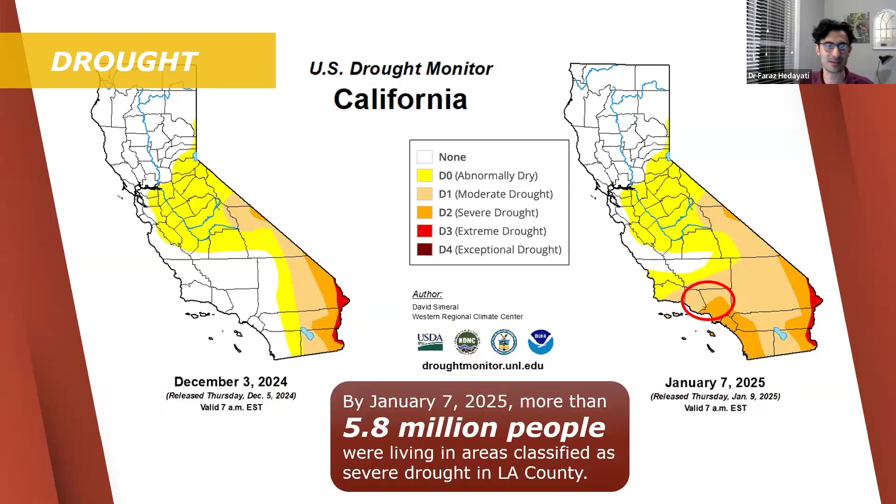So let's start on those and see what the conditions were in the tragedies that we saw in LA. What we had in LA County and Ventura County, the two I highlighted here, is that in about a month we got into severe drought. This is like a flash drought, and what it does to the surface fuel in that area, like chaparral, is quickly dry it out. And when it comes to the wind condition, Santa Ana winds are something that we have at this time of the year.

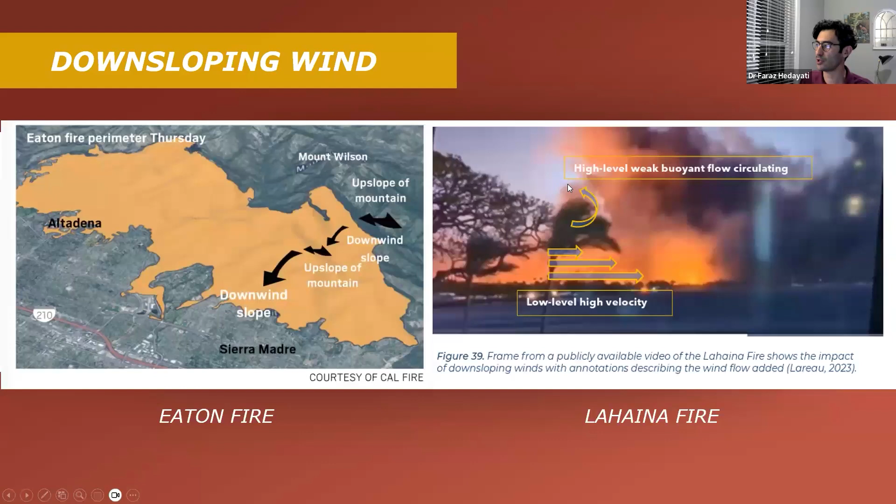This kind of wind exists in Hawaii, in Colorado; different parts of the world have different names. Chinook is another famous name. But they share similar characteristics: at lower altitudes, right off the surface, they have higher velocity. The photo on the right-hand side is actually from Hawaii, which I'll come back to later with the tragedy we had in 2023 in Lahaina. The flow momentum is much higher at the surface compared to the high-level weak buoyant flow or high-level buoyant flow up here.

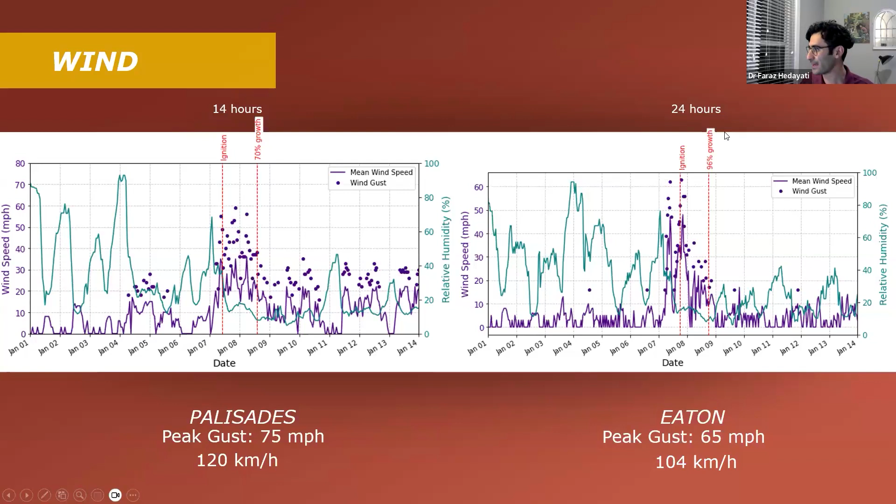The wind speed measured in the LA County fires was about 120 kilometers an hour in the Palisades fire and 104 in the Eaton fire. At this wind speed, all air suppression is grounded and cannot operate. So in only 14 hours, 70% of the growth of the Palisades fire happened, and in 24 hours, 95% of the Eaton fire. So I went through all the natural environment conditions that were in place. All of them were in the most adverse condition.

Now let's move forward and focus on the other category, the built environment. I want to spend some time on structure density. What we did at IBHS to attack this structure density problem was a divide and conquer approach: we started by looking at fire spread from a shed to the main building. I have a source building that is burning, the target building, and I'm measuring the heat flux on the target building. These are full-scale experiments.

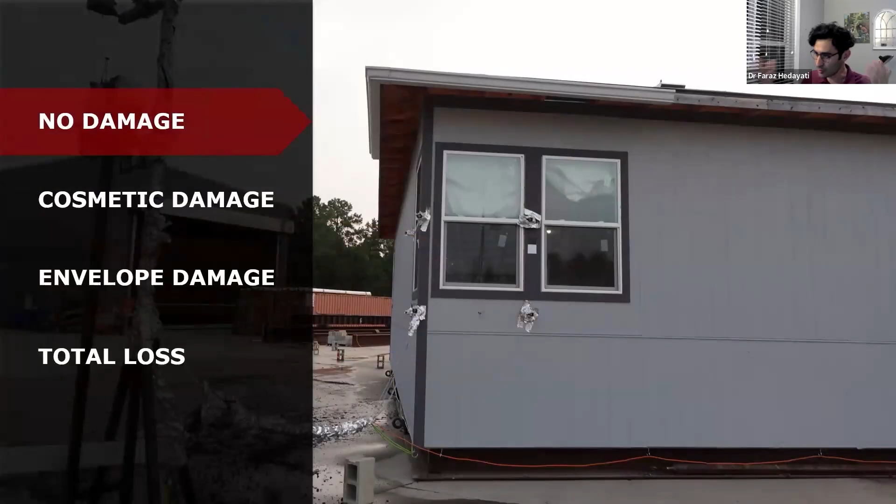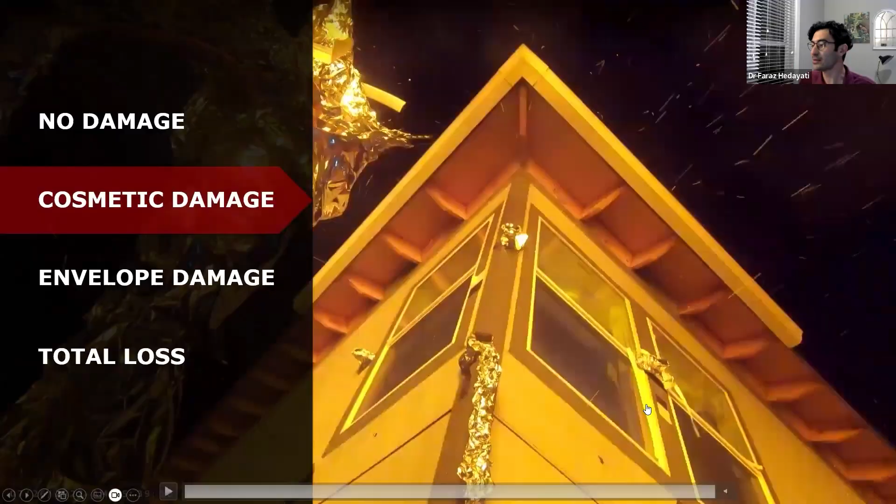The distance between them is 40 feet here. I changed that. The material on the target building changed, the angle, the wind speed, and also the shed type, wood or metal. You see one of the experiments at 40 feet; about 25 of my colleagues were involved in each of these experiments. Going through the damage modes very quickly, we had no damage in two cases at 40 feet separation. Then you see this vinyl glazing melted, and it's dangling around. This type of window has about 70% market share in the US, a very dominant presence.

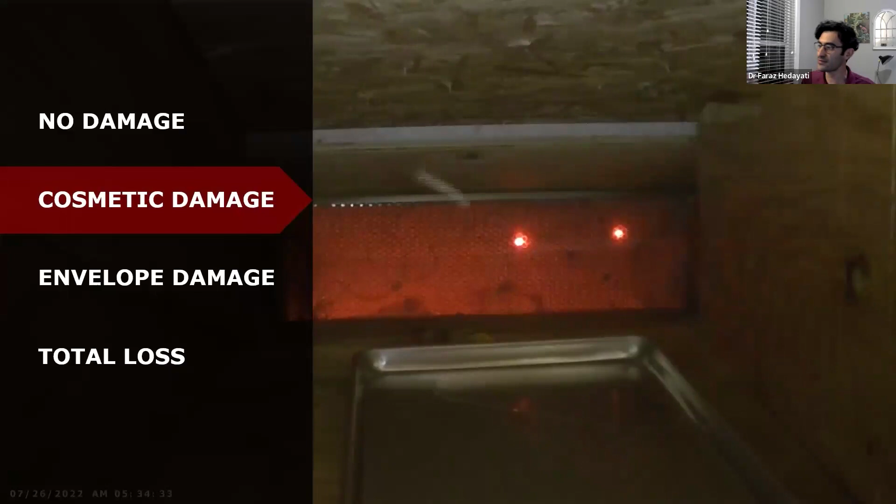When it comes to vents, we all know that embers can get into the attic through the vents. These vents have intumescent paint, so as they receive heat, they expand. So in order to maintain the right ventilation rate for the attic, that needs to be removed, and then some pressure washing, because we had soot accumulation here.

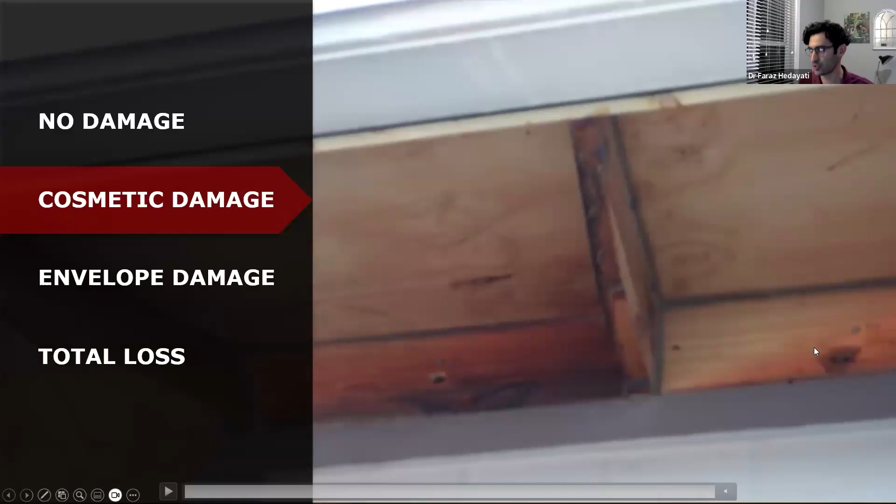Going to envelope damage, you see this window falling out. This one will shortly do the same thing. These are tempered glass. We know they are better than annealed glass, and they just fall out; they don't shatter in place. Annealed glass shatters in place. And this is the aftermath. You need a handyman to basically fix this building. The non-combustible fiber cement siding bowed out in 2 experiments.

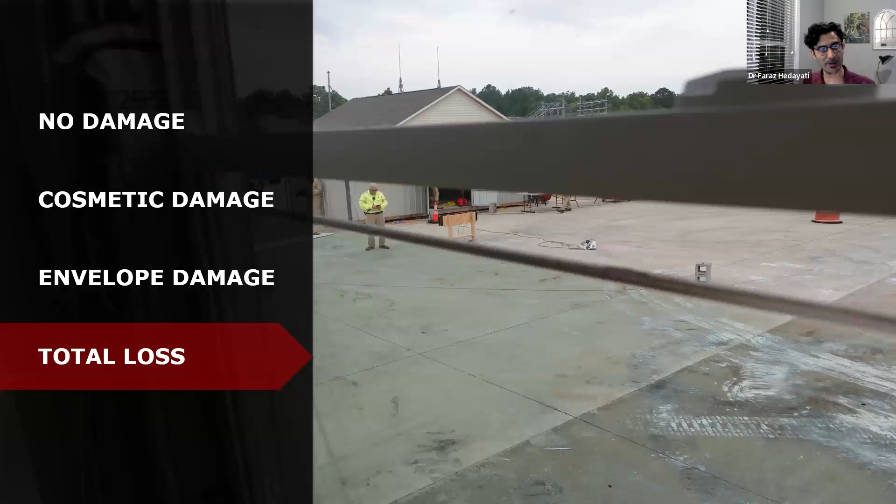A more severe damage that I had: the moving sash of the vinyl window actually bowed in. You see there is an opening here. It's not a wide gap, but it's more severe because after losing the outer pane, the moving sash was deformed. And then we get into total loss. After losing the outer pane, the inner pane slid down in 2 experiments, and this is wide enough, about 5 centimeters, for embers and flames to get in. I put this in total loss because we basically lost the envelope of the building.

In one of my experiments, the fascia board ignited, and the parts that were not covered by non-combustible gutter, you see how that ignited. It wasn't a sustained flame, but if I had let it go, it would convert the building to a pile of ash.

Another building, a more intense ignition on the target building: you see that the eave is engulfed in flames at 10 feet separation, and that's why enclosed eaves are very important in dense neighborhoods, because flame can touch the eave area. And in one of my experiments at 20 feet separation, half of the building is combustible, the other half is non-combustible.

Upon ignition, 5-6 seconds later, flames get through the vents into the attic, basically. Remember I talked about the intumescent paint and how that blocks flame and ember entry? In this case, it did not. And there are several reasons for this. We can get into Q&A about why it didn't happen, but it didn't perform the way that I was expecting it to.

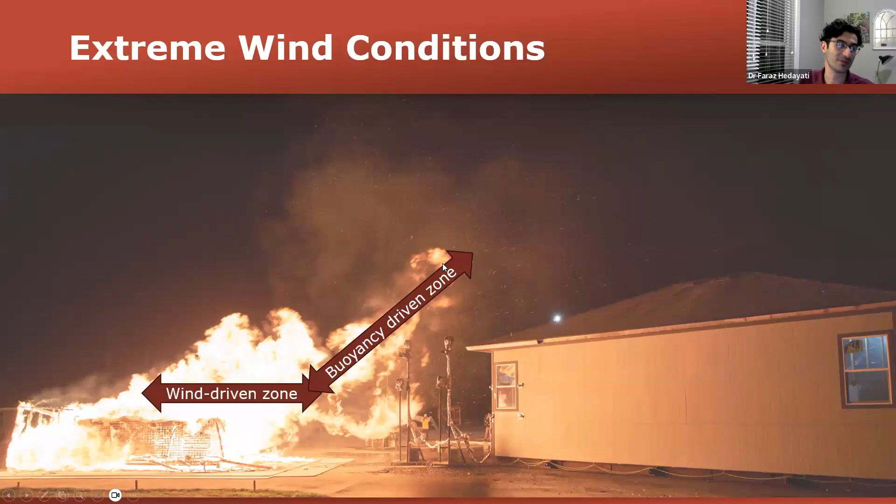So everything I presented up to now were all experiments at 25 to 30 miles an hour wind. Sorry for the units. And then I increased the wind speed to 55 miles an hour. What happens here is part of the flame becomes wind-driven and part becomes buoyancy-driven. The stronger the wind is, the shorter the buoyancy-driven zone is. At 55 miles an hour, I barely have any buoyancy-driven zone. All the heat that was supposed to go into the atmosphere now is touching the target building and igniting it.

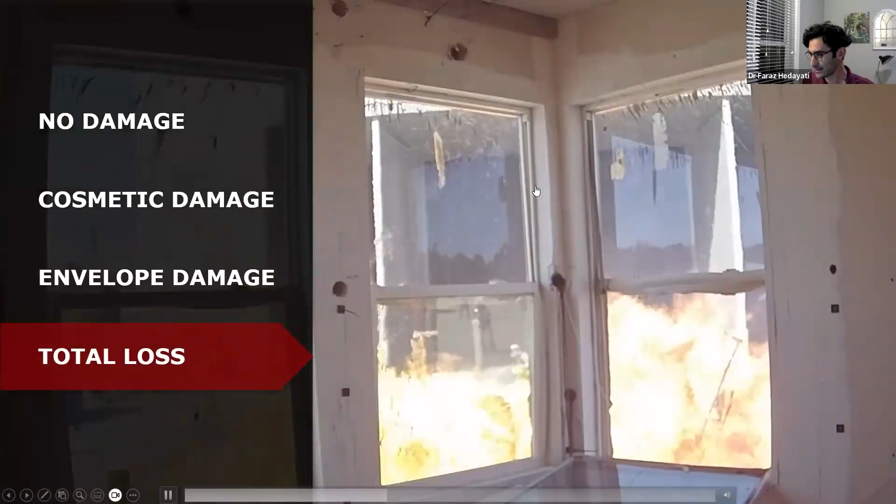We see that we lost some shingles at high wind speed, and this is an interesting failure. This window failed, and you can see this one is pulsating, and at some point it just pushes the window in. So the hot gas or the convective heat transfer softens the material, the vinyl, and then the wind pressure pushes that in.

The other common criteria in our field is to look at total energy that the target building received. And you can see that in the case that led to ignition at 10 feet, it is lower than the rest of them. So this too is not the criteria to look at when it comes to discriminating the risk. The reason is that it happens at a shorter time. The building ignites, there is no energy to receive after that, right? So a shorter time, less energy.

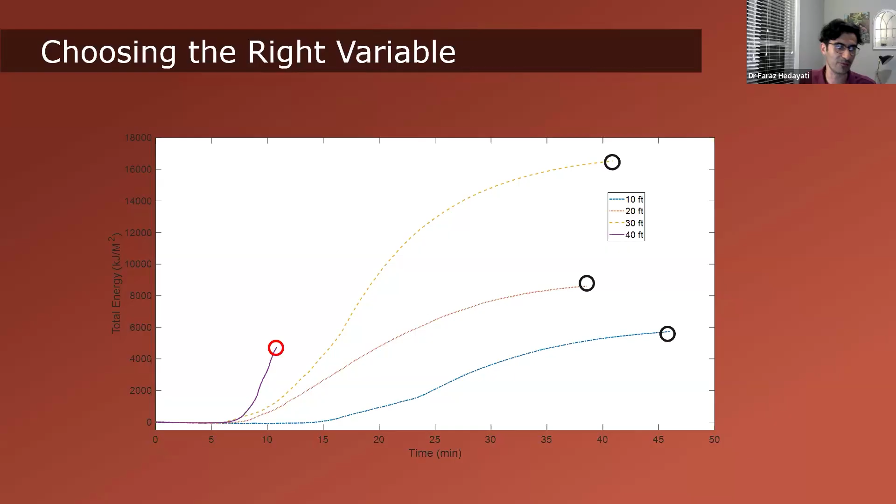But if we look at energy input in 10, 20, 30 seconds, and I don't want to get into the details, the reason I'm going after tens of seconds is that it's the response time of building materials. Pine needles are in the order of a second, building materials in the order of tens of seconds. We start seeing a very interesting pattern.

We see that among all the possible outcomes, when I have no damage, all the events are here in this range, right? When I have some damage, the distribution changes. There is a meaningful shift to the right. Similarly, when I get to loss, this shift continues to move forward. So imagine I have this threshold here. I'm well into the orange distribution, this one here, and start to touch the loss distribution.

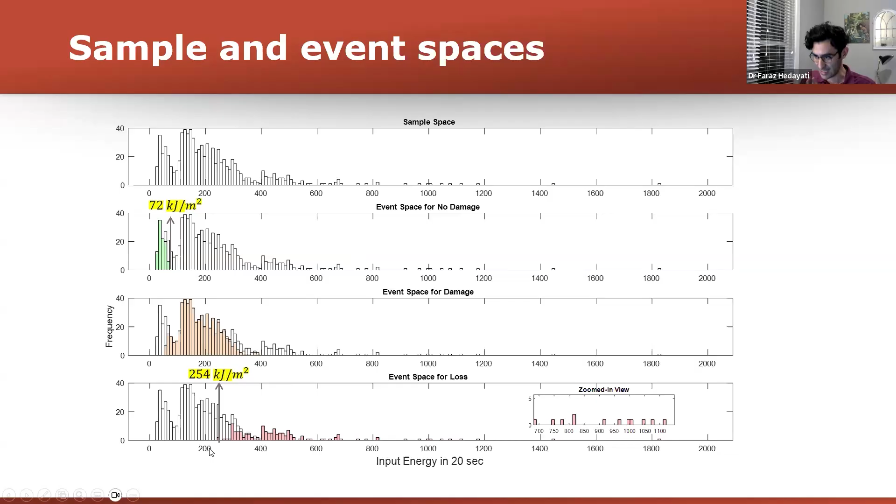So in a probabilistic way, I can look at it and ask, what are the different possibilities or likelihood of damage modes? But the takeaway is, if the energy input is above this threshold, I get into damage, and if it's above this threshold, I get into loss.

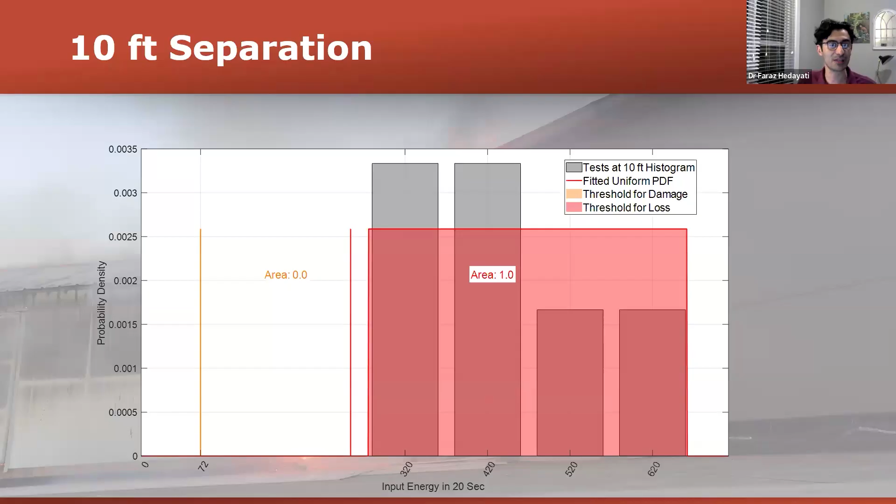So at 10 feet separation, we see the background photo, direct flame contact, and the gray histograms in the background are the energy input. All of them are above the critical threshold. So I'm 100% into this distribution. Going back to 20 feet, from 100% I go down to 34%. Now I have a way to discriminate the likelihood of total loss as the distance increases.

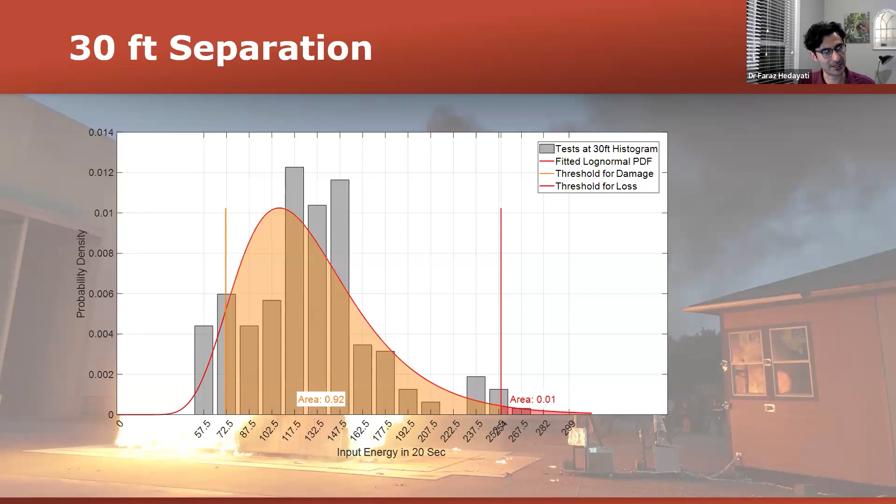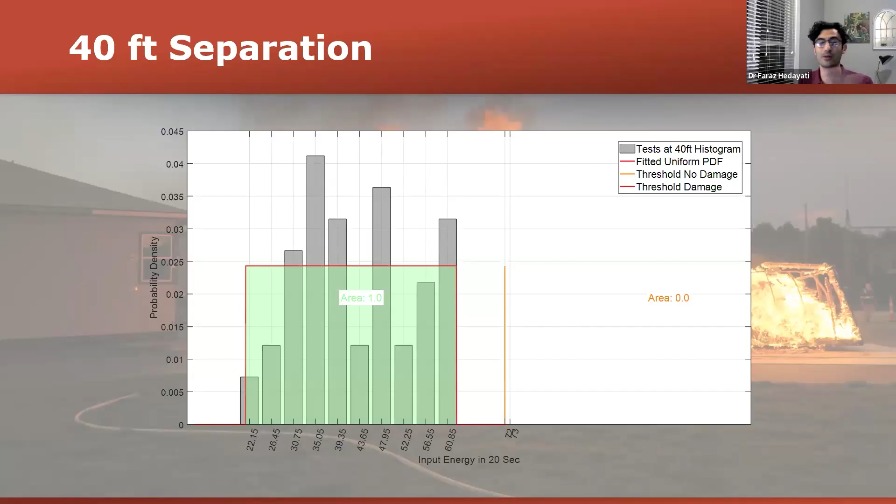Going further back, there is no flame contact, it's mostly radiation and convective heat transfer, and it gets down to 1%. And at 40 feet, you can see in the background the flame is not even close to the target building, and all of those energy packets are below the lower threshold. So I have no chance of any damage on the target building. And this is the takeaway.

With the conditions that I have here, I'm not going to go through this list, but these are the limitations of this framework, basically what I tested. We can see that as the distance increases, what is the likelihood of structure-to-structure fire spread in these configurations.

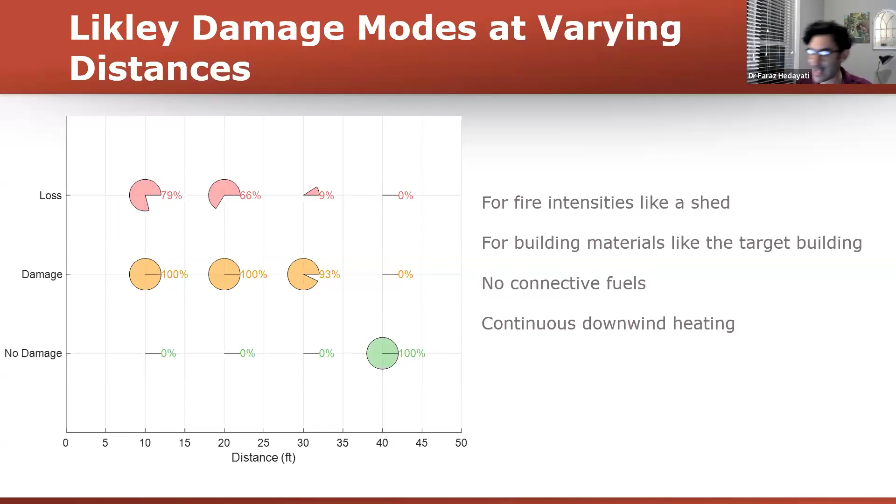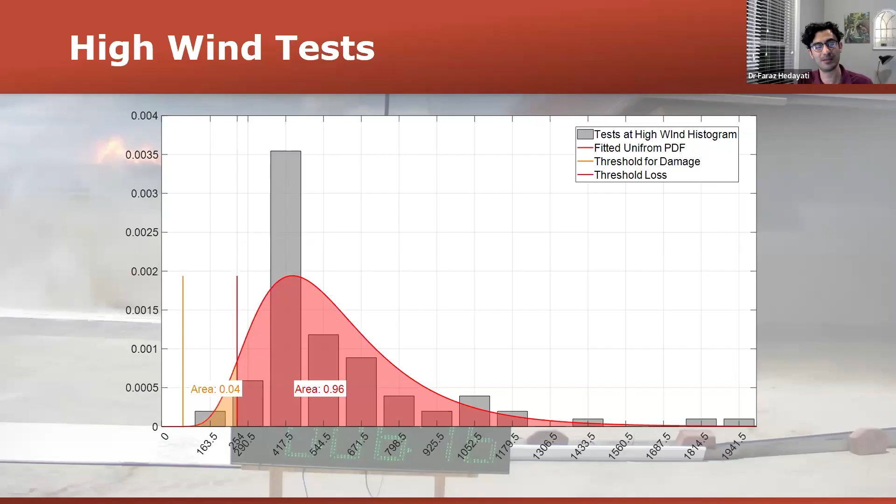I didn't talk about high wind speed and the impacts of 55 miles an hour wind on the outcome. Well, regardless of the distance, 96% into the distribution and into the loss distribution. And this is actually what happened in Lahaina, what happened in the LA County fires. The wind speed pushed all that heat that was supposed to go up to the buildings downwind, and then that led to overwhelming the building material. Anything that was in the typical building materials all got overwhelmed, and we see that tragedy.

We saw that tragedy. So after this shed experiment, I scaled up to ADUs. So similar approach, but instead of a burning shed, now I have a burning accessory dwelling unit or ADUs. So as you're looking at this video, one of them is wood, one of them is fiber cement, and one of them is stucco. And we see that regardless of the siding, the way that these buildings fail is the same. Doors and windows fail way before the siding plays a role.

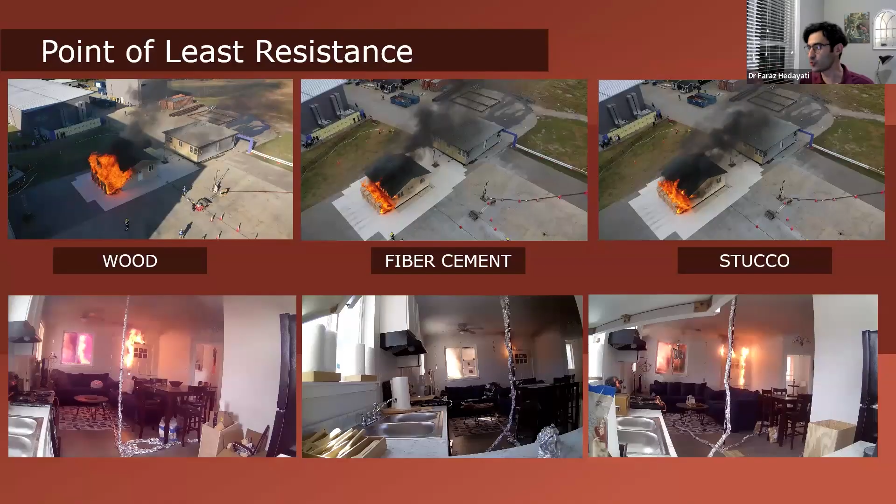There are ways to quantify it, which we can talk about offline. But the point of least resistance is a very important topic, and it is very important to look at the building as a system, not individual components. Well, while the siding didn't play a role in reducing the vulnerability of this building specifically, it does play a role in slowing down the fire spread in the community.

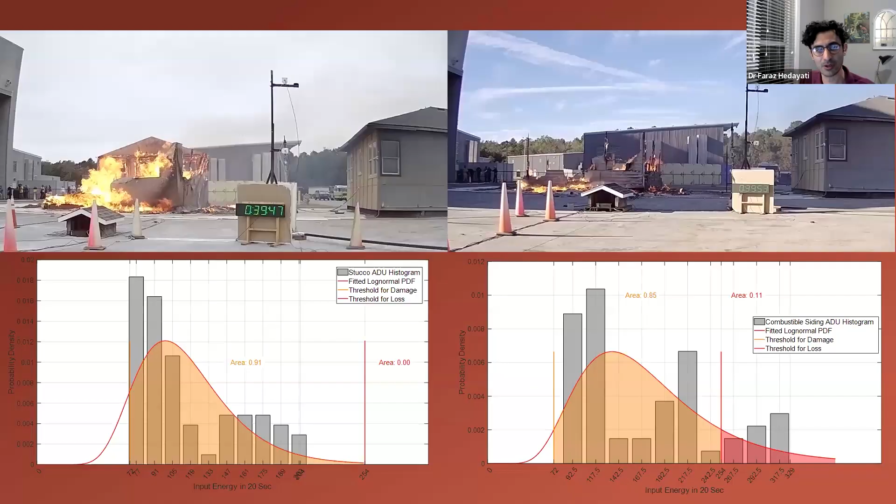So you can see after 40 minutes, this is a stucco building and this is a wood building. Because the structure stays in place for a stucco, it traps a lot of the heat behind it, basically. And we see that none of those energy packets that were hitting the target building is in the loss zone. But when we have wood, we clearly see a difference. So this is very important that if we use stucco or this kind of material, we can slow down the progress of fire in a community.

So going back to LA, this is in Palisades, and I talked about at 40 feet separation, there is zero chance of any loss, any damage. This shows that this building is 60 feet apart from this, and the wind speed is from right to left here, like that. So all of the heat that this building released was hitting 221. And because the window was extremely vulnerable, one pane, annealed glass with wood frame.

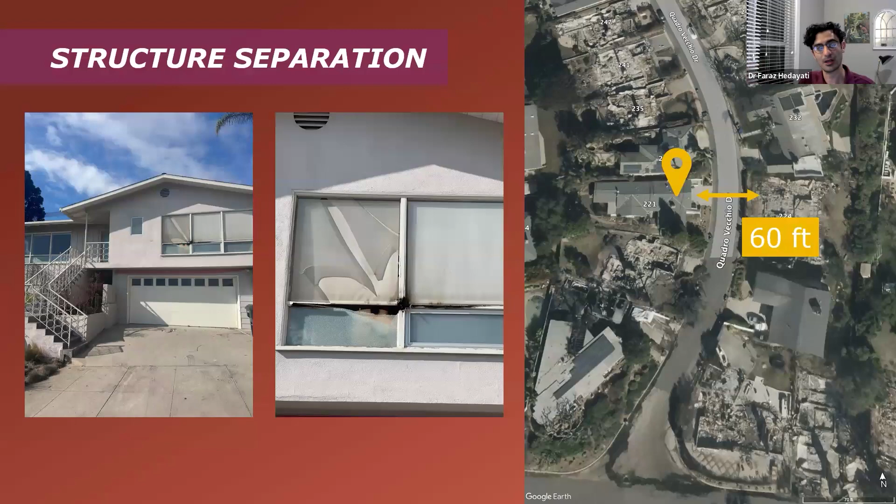Well, we did see some damage, and this is my point: we can't just stretch the experimental result into the field without knowing all these details. If this window was the same as what I tested at IBHS, we would probably see a similar result to the test that I ran at IBHS. So everything I talked about is the worst case condition, downwind heating.

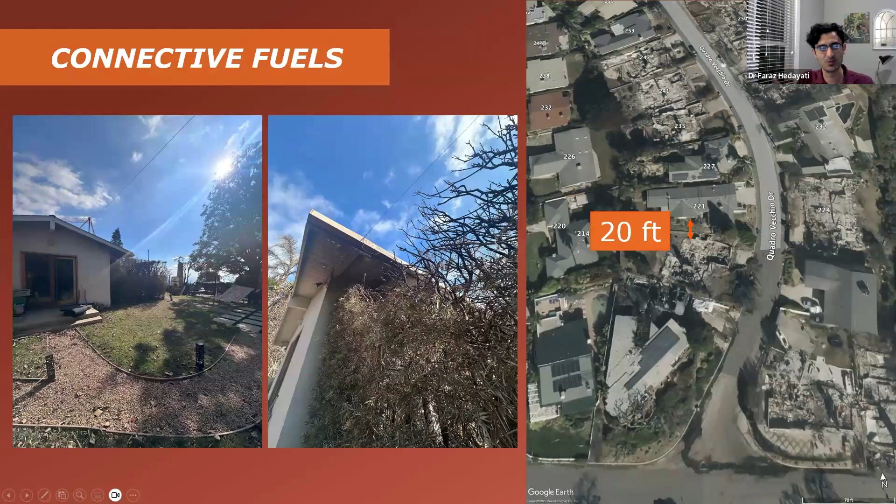So this is the same building that I just talked about, 221. So the window was here, and downwind heating is basically 224 pushes all the heat to 221. But we also have crosswind condition. So as this building ignited, because of the connective fuel here between this building down here to this, it carried all the flame here in crosswind condition and heated it. This was suppressed by first responders, otherwise it would be a different story for this building. So in crosswind condition and downwind condition, the risk is quite different.

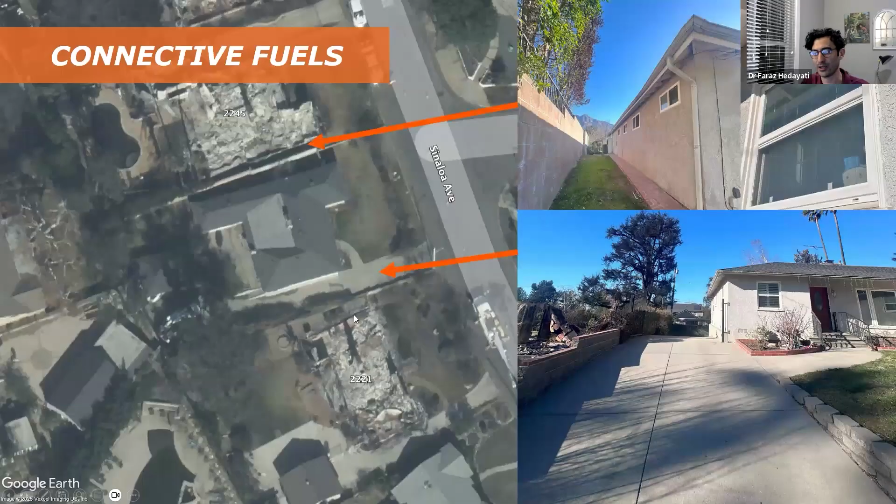So in this case, both of the neighbors ignited or were destroyed, and this building received a lot of heat from burning all of these neighbors around, this guy, this guy, this guy. Because there is no connective fuel here, this is a driveway, there was no damage here. And on the other side, remember I talked about the stucco and how it can trap the heat to compartmentalize the fire? This fence did the same. So the neighbor here was all consumed, the structure is consumed, but all the heat stayed on this side and didn't cause any damage on this one.

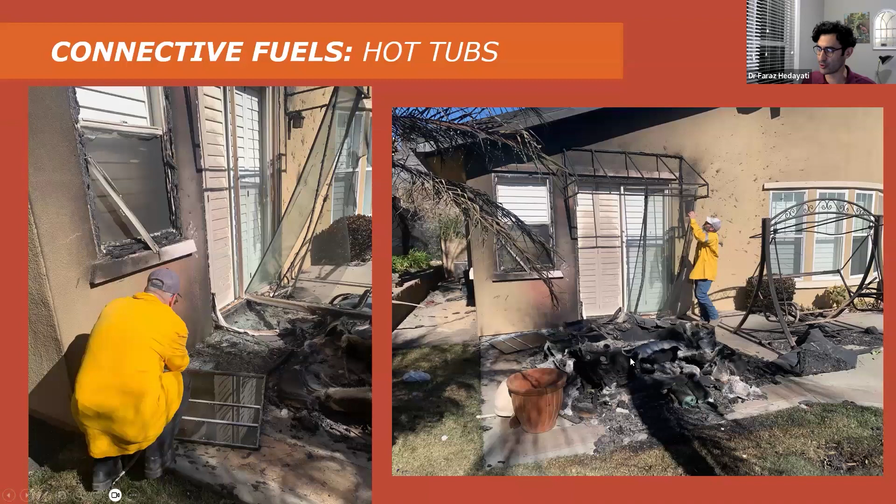So on the day of the fire, it was trash day. So a lot of trash cans were out, and that played a big role in acting as connective fuel and caused a lot of damage on buildings. We had several examples like this. Hot tubs, another one that is probably not very common to think about. We saw examples of that. So this hot tub was ignited by embers, and because of its ignition, we have some serious damage on all the openings on this building.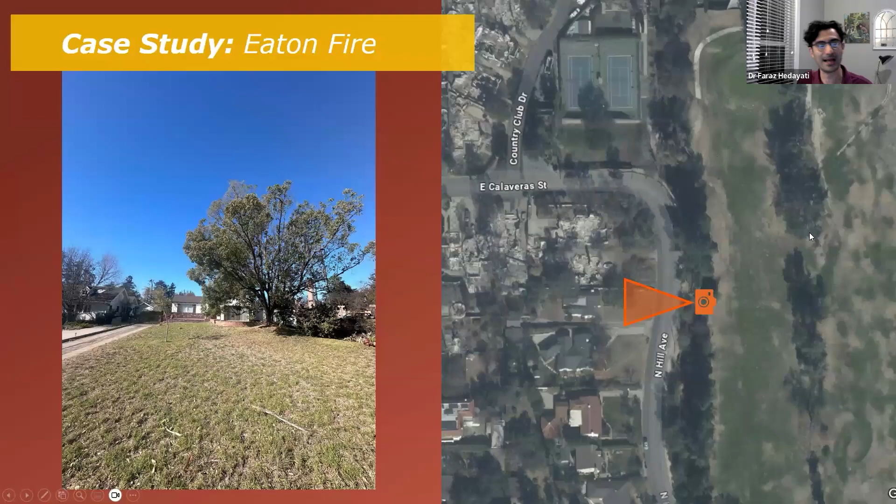This is an example from the right-hand side, the green area here is Altadena Golf Course. And then I'm standing here taking a photo. You see that embers flew over the golf field, basically, and ignited this, all the combustibles here. But because there is no combustible touching the building, there is no damage.

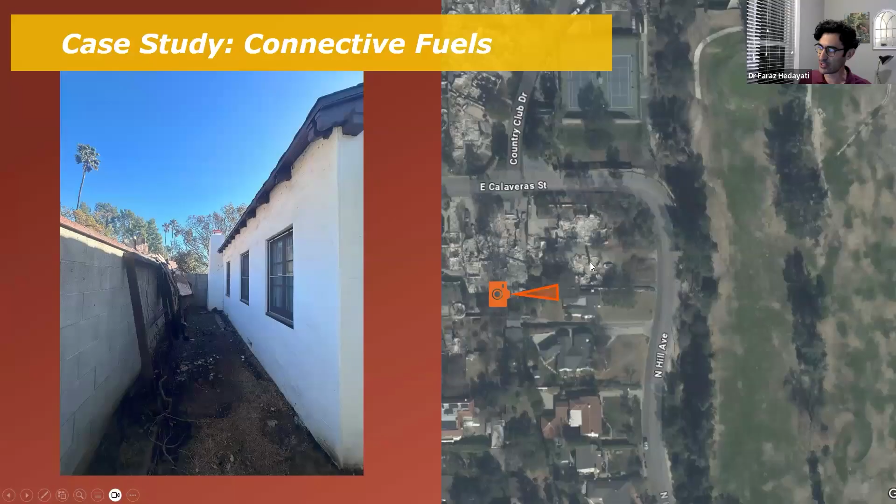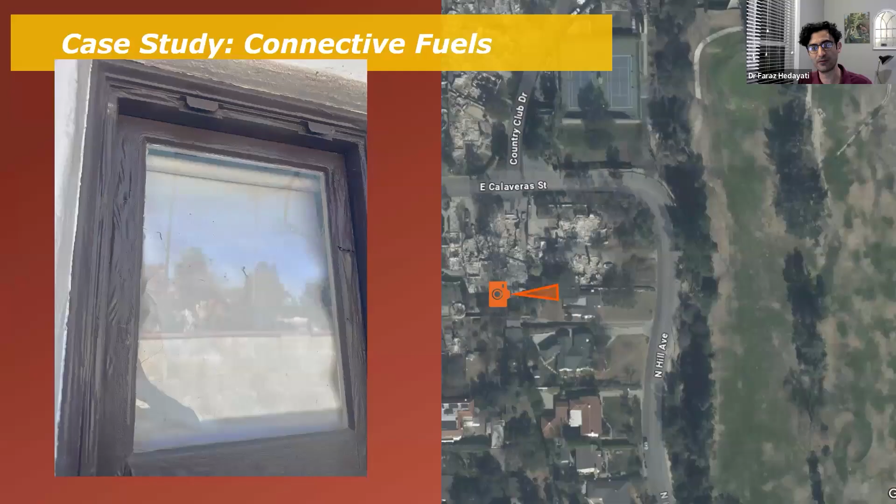On the back side of this building, this neighbor ignited, and because of this awning acting as a connective fuel, carried the fire over, and you can see the fascia board here is damaged, and the window is also damaged. So without having this connective fuel in crosswind condition, we can stop the chain of conflagration.

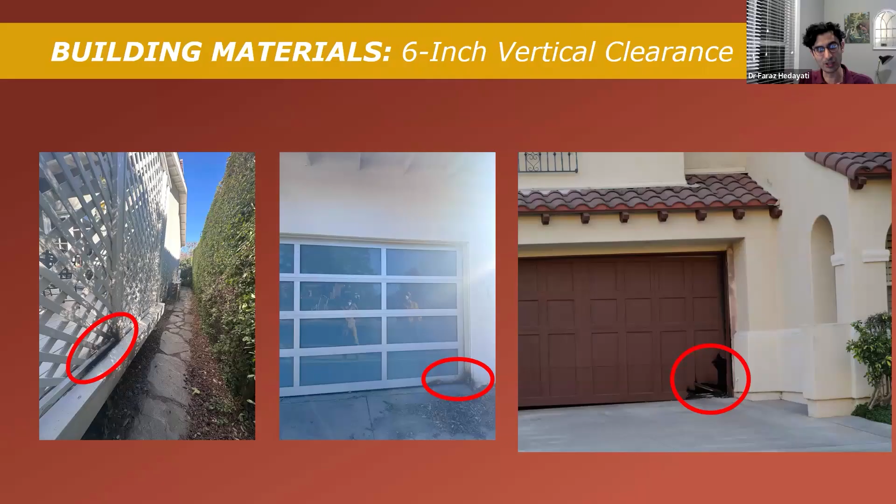6-inch vertical clearance. So we saw examples of embers accumulating at the base of combustible walls, combustible decks, igniting that. All of these 3 cases are suppressed by first responders. And window panes, we talked about windows in the lab, basically, but having annealed glass is vulnerable. And if they were tempered glass here, there would be no damage on this building.

I want to conclude my talk by taking you to Hawaii. So 6 weeks after the fire, IBHS deployed a team, 6 of us went to Hawaii, and we looked at the tragedy that took place in Lahaina. Early in the morning, a brush fire was reported in the highlighted area, which was immediately suppressed by first responders. Then the fire was rekindled closer to the built environment, where you see the Lahaina bypass. And in that area, the grassland was touching the built environment.

Grass fires do not produce embers. The embers burn out as they fly. But when they touch the buildings, they can ignite those, and then the fire becomes ember-driven. And all the embers from the burning structures in this area flew about a mile, 1.5 kilometers, landed on combustible siding or roof on Front Street, ignited that, and the chain of conflagration started, multiple fire fronts in the community. Later in the afternoon, embers ignited homes in the highlighted area.

When I was in Hawaii, I ran into a firefighter, off-duty firefighter, who decided to stay behind and save homes. He ran into dry hydrants, and he did the next best thing, which was jumping on his bike and documenting the fire. And so credit where it's due, Dan Nelson shared all of this footage with me.

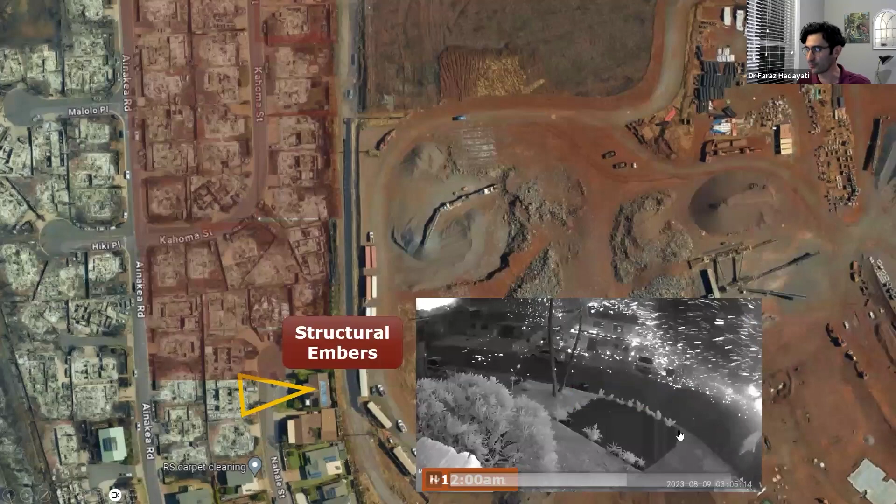So when these homes were burning, the fire became ember-driven. And then the security footage from his home shows how heavy the ember attack was at the time. But this building, despite being bombarded by all of these embers, thousands per second, all the building materials did their job. The building survived because it has a non-combustible roof, 6-inch clearance at the base of the wall, and maintained defensible space around it.

The reason that this building failed was that connective fuel, the fence, was touching the window here. And then you could actually hear in the video that the windows crack and then flames get into the building, basically. And look at this, it's literally a war zone. The chain of conflagration keeps moving on. And because of this connective fuel here, again, after this building burned, it passed the torch, pun intended, to this building and ignited that as well.

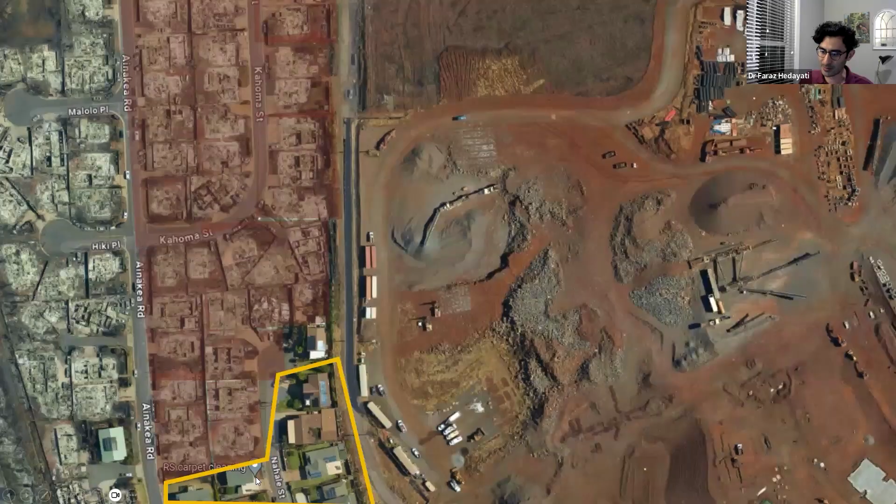And the chain of conflagration only stopped in this area when there is no connective fuel between the two buildings. So without having connective fuel in cross condition, we can break the chain of conflagration. And you can see this building started off-gassing. The siding is blistering, the fascia board is smoking, basically, but it didn't ignite. And the chain of conflagration stopped here, and that led to having multiple buildings down here survive.

And these are the important parameters in the Lahaina tragedy that we have. The structure density was the driving factor of risk, which impacts connective fuel. We have more vehicles, we have more sheds, we have more fences when we have high density neighborhoods. And then eventually we get to building materials. This is a slippery slope.

This doesn't mean that building materials don't matter. What it means is that when the exposure, the heat exposure is so high that structure density and connective fuel play a role in that, they can overwhelm building material. And in order to get the benefit from building materials, we need to reduce exposure by spacing out buildings in new developments. In existing developments, we need to remove connective fuel to give a fighting chance to building material.

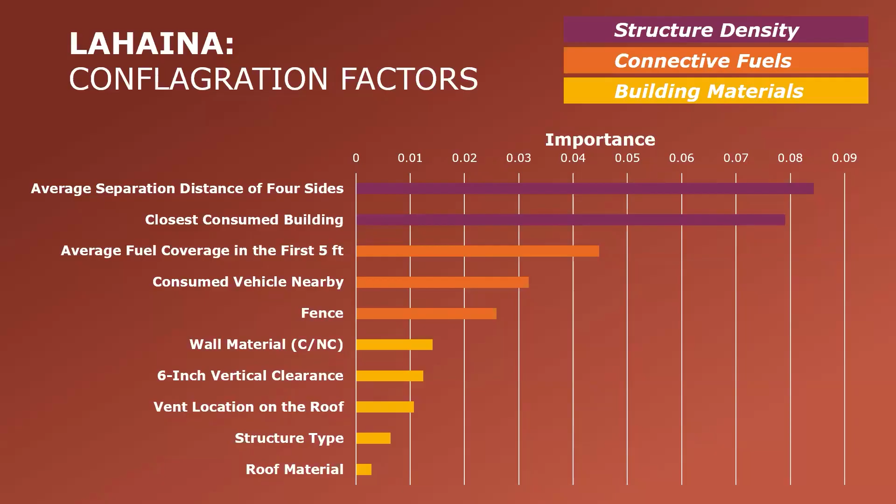And thanks for listening. Faraz, thank you very much for your presentation to us this morning. I think everybody's taken a lot out of that, particularly aspects around urban vulnerability and urban fire spread and urban risk, which we're obviously very focused on here in Australia.